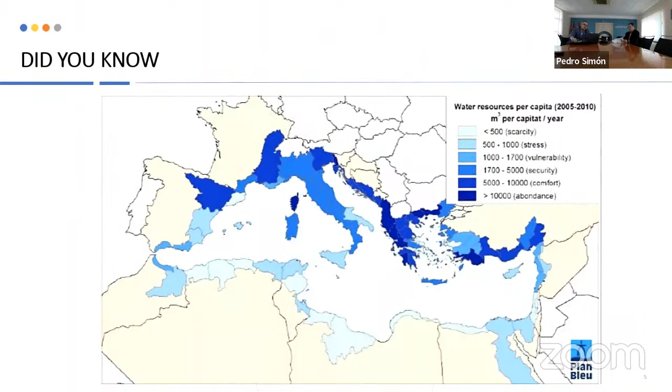So, some statistics concerning the Mediterranean challenges. We are all aware that the availability of water in the Mediterranean basin is limited. Therefore, our area is one of the most vulnerable to the water crisis. As you can see in this picture, freshwater resources are unevenly spread across the country.

Nearly two-thirds are concentrated in the northern rim countries, while most countries on the southern and eastern shores of the Mediterranean are under water stress, disposing of less than 1,000 cubic meters per capita per year. This amount corresponds not only to domestic uses but also agricultural and industrial uses per capita in a country. Some countries like Libya, Malta, Jordan, Palestine, Israel, Tunisia, and Algeria, which count altogether a population of roughly 80 million people, are in a structural shortage situation with less than 500 cubic meters per capita per year.

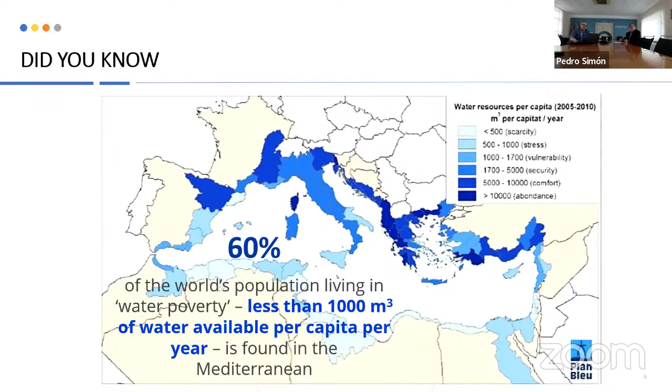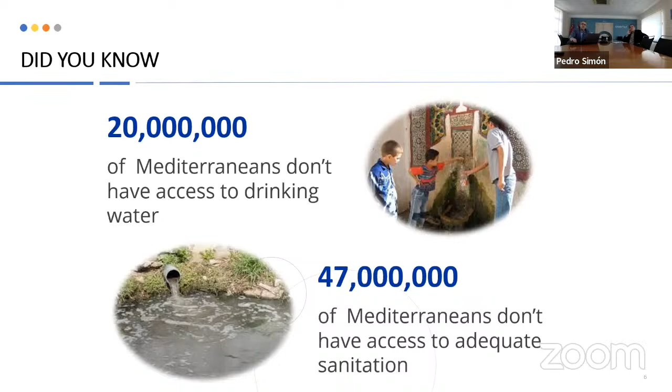About 20 million Mediterraneans, I think this is a quite old statistic, it's more now, don't have access to drinking water, while 47 million Mediterraneans don't have access to adequate sanitation.

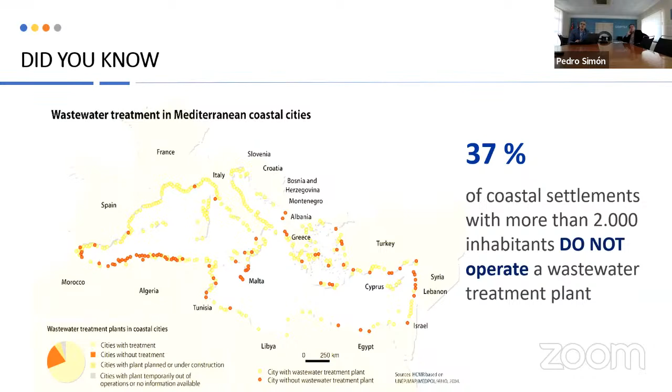Concerning wastewater treatment plants, as you can see in this figure, the distribution is not uniform across the Mediterranean region, with no sewage treatment in many cities on the southern shore of the Western Basin, such as coastal Sicily, the eastern coast of the Adriatic, the Aegean, and the northern corner of the Levantine Basin. Around 37% of coastal settlements with more than 2,000 inhabitants do not operate any wastewater treatment plant.

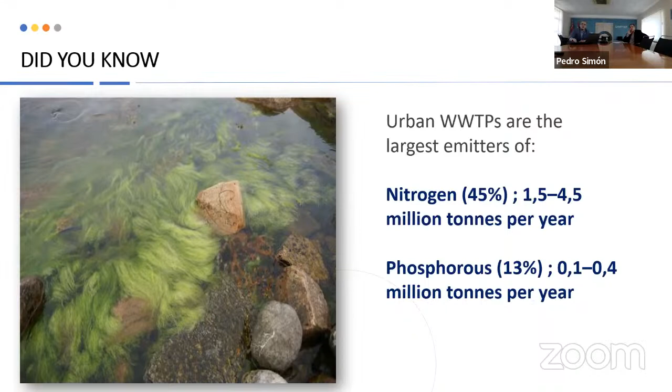You are all aware of the nutrient problem that creates eutrophication. Urban wastewater treatment plants are the largest emitters of nitrogen and phosphorus, with around 1.5 to 4.5 million tons per year of nitrogen released to surface waters, while phosphorus release is 0.1 to 0.4 million tons per year, creating these big eutrophication issues. This could be a major source of nutrient recovery for valorization as fertilizer in our backyard agriculture.

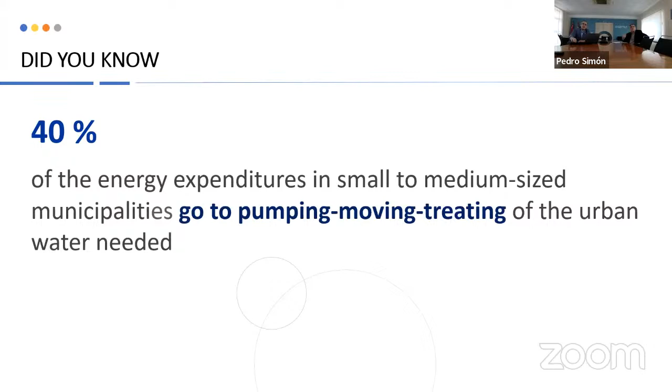Concerning the market, around $211 billion is expected to reach the water market by 2025. As you understand, this opens and provides many opportunities, job opportunities, especially for green jobs.

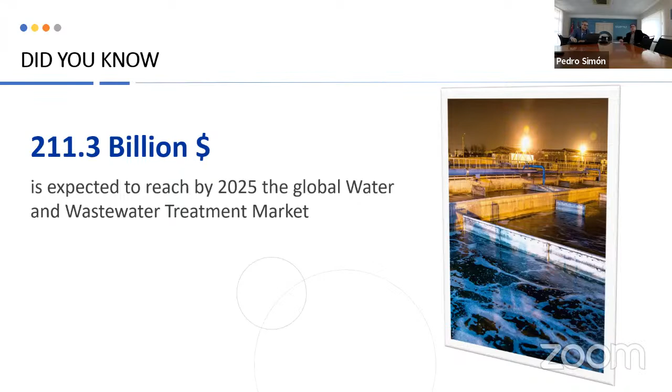So to summarize, people say that numbers don't lie. I would say that statistics don't lie, since the numbers don't tell the whole story, but sometimes can be manipulated. From the statistical data presented, it is understood that the Mediterranean area is one of the most vulnerable to water crisis and to the impacts of global warming. Despite some currently encouraging progress, the current water use efficiency in the drinking water and irrigation sector still presents a challenge for the area.

So let's move now to the next slides. Concerning the project that I'm currently coordinating, this MedWeCap project. MedWeCap is a capitalization project, as already mentioned.

This is the first time that the European Union, under the ENI CBC Med program, funds this kind of project, which answers the need to enhance and make further use of the consolidated results and knowledge and experiences of a selected number of successful projects implemented in the Mediterranean area, including our joint project with Pedro Aquacycle, under the same thematic priority, which is water efficiency.

Specifically, in MedWeCap we aim to promote, exploit, and disseminate the successful practices and results of 6 previously financed projects in the Med region on non-conventional water resources, treatment and reuse for the mitigation of water needs. When we talk about non-conventional water resources, we're talking about treated wastewater, municipal especially.

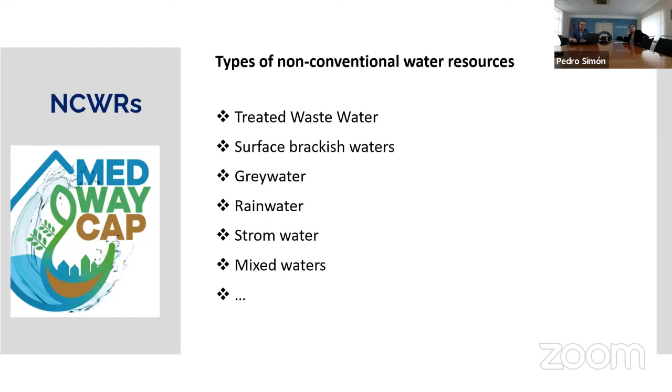We're talking about surface brackish water, grey water at the domestic level, rainwater harvesting, stormwater, mixed waters, and all kinds of waters that humanity does not necessarily valorize directly in order to produce drinking water, such as groundwater or surface water.

About the program, the project identity: the project is funded under priority B41 and is composed of 5 EU partners, 4 Mediterranean partners, 1 international organization based in Italy, and 12 associate partners from Greece, Italy, Malta, Spain, Egypt, Palestine, Tunisia, and Jordan.

The main challenge is to provide challenge-driven cooperation in the area through a coherent and continuous cross-border dialogue and process, capacity building of the related staff, and easy access to information and friendly use of tools for mutual learning. It's a 2 year project that started on the 1st of October 2021, and will end this year by the end of September. It has a total budget of 1.1 million euros, with an ENI contribution of about 1 million euros.

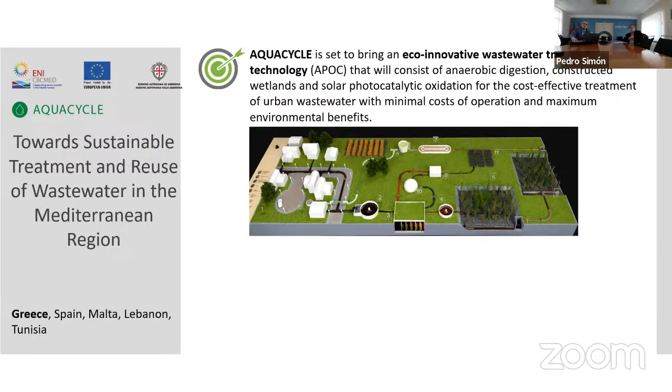The minimum energy required for the operation of this plant can be covered by renewable energy such as photovoltaics, or by the biogas produced from the anaerobic digestion process, in order to heat the respective reactor.

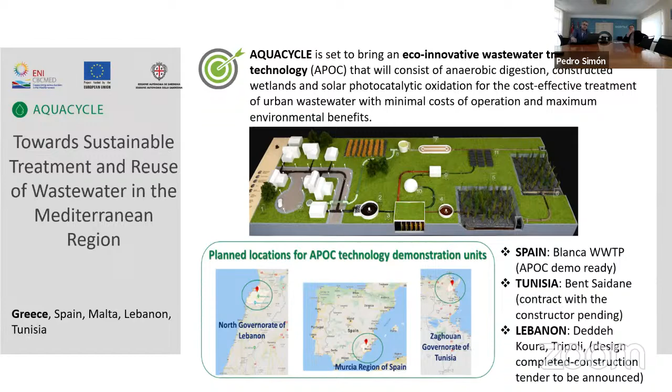Here you can see some info concerning the APOC system. APOC stands for anaerobic digestion, photocatalytic oxidation, and constructed wetland. Anaerobic treatment and constructed wetland are two mature commercialized technologies with wide applications, combined with this novel photocatalytic oxidation for high disinfection and removal of contaminants of emerging concern.

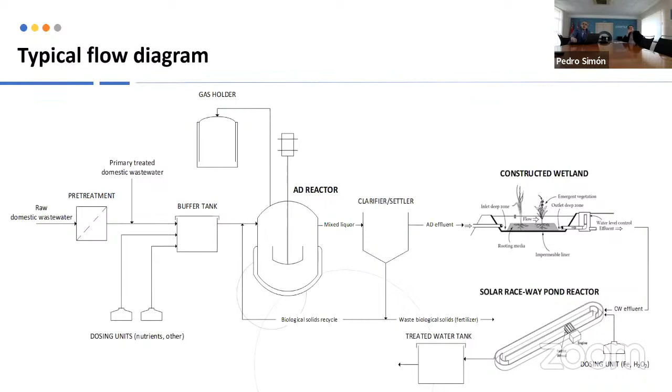Here is a typical flow diagram, a sketch, but of course this is a matter of design depending on the composition of the effluent and the final treatment target set by the designer.

I would like to say a few words concerning solar photo-Fenton. It's an advanced chemical oxidation process that has attracted major scientific interest as a promising alternative for the degradation of contaminants of emerging concern. The heart of this process is the in-situ production of strong hydroxyl radicals, an environmentally friendly reagent with a half-life of a few nanoseconds that can destroy all kinds of emerging organic pollutants.

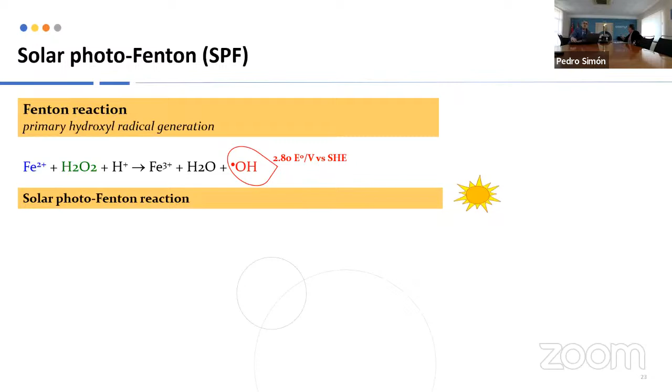Since this could be an energy-intensive process, we valorize solar energy to promote a higher regeneration rate of the iron species required to drive this reduction for the in-situ production of hydroxyl radicals. On the other hand, solar radiation also promotes the photolysis of iron carboxylate intermediates for the recovery of iron, to catalyze again the reaction with hydrogen peroxide for the production of hydroxyl radicals.

And also the photolysis of hydrogen peroxide in the UVB region promotes an additional production of strong hydroxyl radicals. And at the same time, we can have a direct solar disinfection. These are the main APOC benefits.

On one hand, we utilize solar energy, which is an abundant resource in the Mediterranean region. We can also produce biogas by anaerobic digestion. We minimize the production of excess secondary sludge we see in conventional aerobic systems. We also have a solid digestate that can be used for land fertilization. And these systems, as you have understood, can be implemented using local skills and know-how without any necessary expertise.

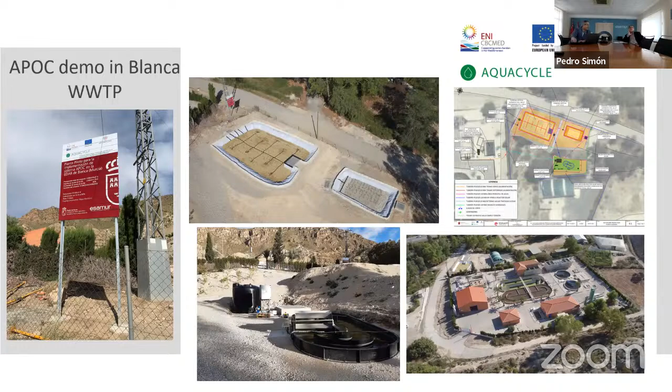Here you can see some photos of the APOC demo plant in the region of Blanca, wastewater treatment plants. I don't know if Pedro will talk about it later in his talk.

I would like also to invite you to visit our e-training platform produced by the AquaCycle Partnership, describing the principles for the design, the operation, and the maintenance of the three different components of the APOC system. I invite you also to register to our forum. This tool is useful. It's an open access tool. It can also be used by professors to train students on the different components composing the APOC system.

A few slides concerning the NAWAMED project. NAWAMED is also a project funded by ENI CBC Med with partners from 5 countries. We have joined forces to implement real-scale pilot installations for grey water in this case, not municipal wastewater, for grey water and rainwater treatment and reuse in each participating country, in Italy, in Tunisia, in Jordan, and in Lebanon. And the recovered grey water will be reused for different purposes, including toilet flushing and irrigation, therefore reducing the consumption of potable water for domestic uses.

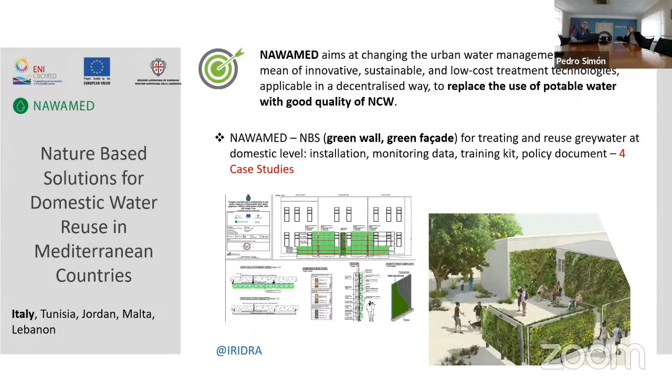In this specific project, we see the implementation of nature-based solutions, such as green wall and green facade technologies. For this specific technology, we have 4 case studies. Here are some slides concerning the living wall in Ferla, Italy, which has been installed in a middle school in Sicily with a total of about 190 students.

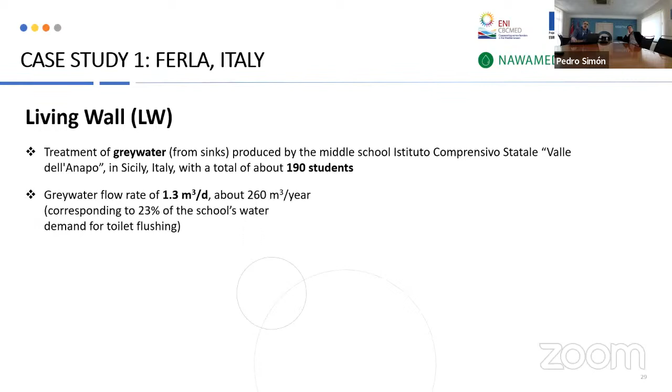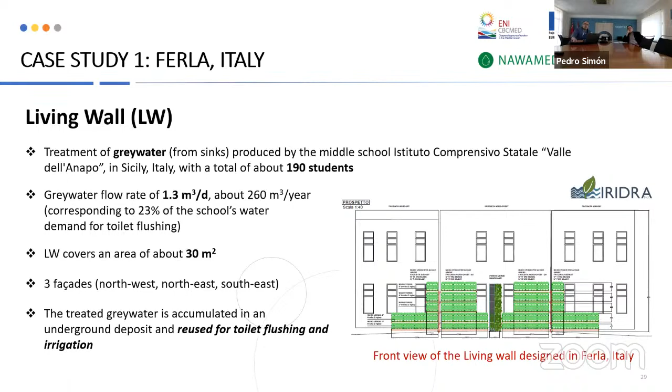Here you can see some info concerning this specific living wall with an area of about 30 square meters and a grey water flow rate of 1.3 cubic meters per day, and the treated water is used for toilet flushing and for irrigation. Here you can see some photos of this installation, and the good thing is you can also see an educational activity for the students to learn more about how this nature-based solution operates and treats the grey water produced within the school.

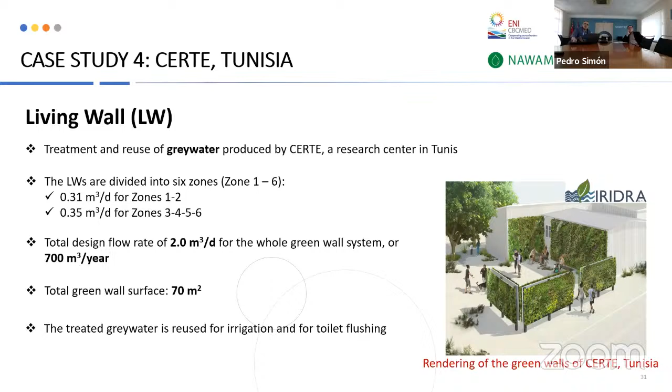Another case study at the premises of CERTE, which is an institution there in Tunis. Again, applying this living wall concept with 2 cubic meters per day of design flow rate capacity, which equals 700 cubic meters of grey water reused. Here the total surface area is larger, 70 square meters. And again, this specific installation is used for toilet flushing. Here you can see that the vegetation is in a growing stage in comparison with Ferla in Italy.

So now we move to MENAWARA. It's another project that is currently being capitalized by the MedWaterCap project. This specific project is coordinated by the University of Sassari in Italy. And this project is proposing sustainable, clean and environmentally friendly solutions based on the reuse of non-conventional waters, in particular drainage water. Fundamental for this project is the fit-for-purpose approach, a new important concept in water reuse, which entails the production of reclaimed water quality that meets the needs of the intended end users.

Here you can see one technique implemented, which is the managed aquifer recharge technique based on forested infiltration areas for treating nitrate-polluted groundwater and drainage water in Arborea in Italy. Here you can see some actions promoted through the MENAWARA project.

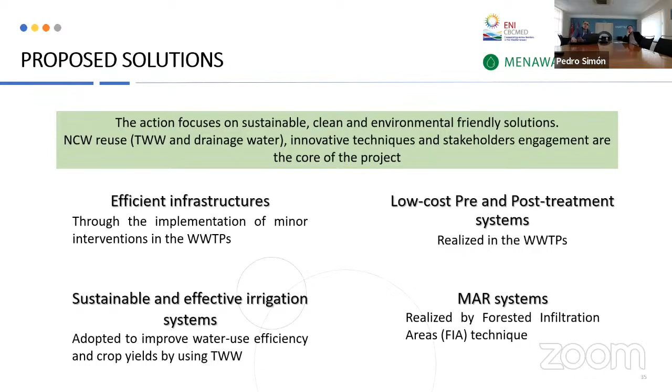So on one hand, we have the implementation of minor interventions in existing wastewater treatment plants. We have the development of sustainable irrigation systems to improve water efficiency and crop yields by using treated wastewater. We have low-cost pre- and post-treatment systems realized in wastewater treatment plants and these MAR systems which are currently implemented in forested infiltration areas.

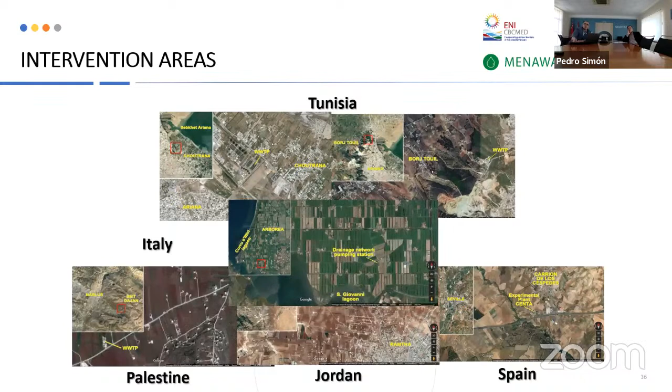Here you can see the demonstration areas in Tunisia, in Palestine, in Jordan, in Spain, and in Italy. Here you can see also in Jordan the different irrigation methods applied, such as sprinkler, surface, drip, and subsurface, on alfalfa to improve the alfalfa yield, quantity, and quality.

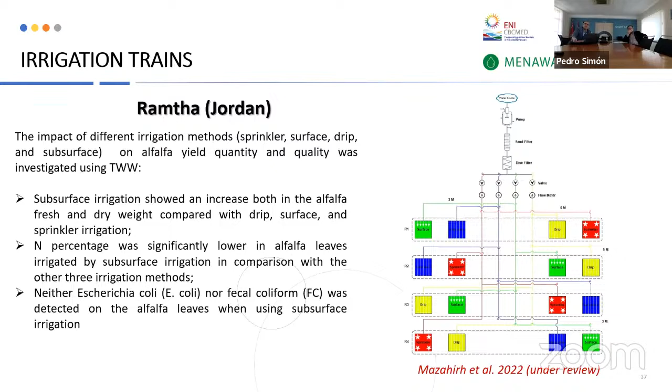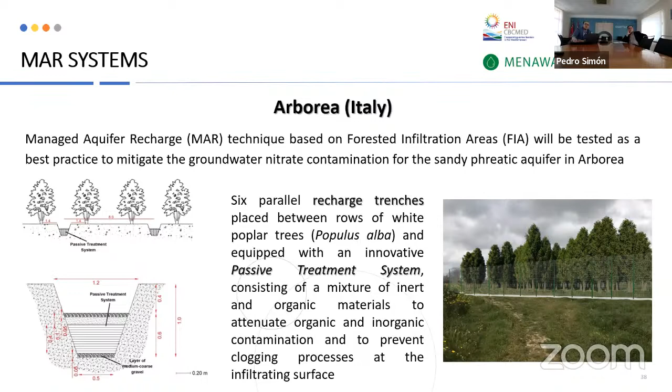In Arborea, I already mentioned this MAR technique. Six parallel recharge trenches are being implemented, placed between rows of white poplar trees and equipped with an innovative passive treatment system consisting of a mixture of inert and organic materials to attenuate organic and inorganic contamination and to prevent the clogging processes at the infiltrating surface.

So to conclude, I don't know about the time. I think it's already 30 minutes that I'm talking.

And concerning the labor market, we see that 3 out of 4 jobs worldwide are water dependent, while 15 million jobs should be created in the next decade to absorb the growing labor supply in the Mediterranean region. In order to tackle this issue, which is a global challenge, we need a collective response involving public and private stakeholders, government, academia, businesses, and civil society at local, national, and regional level, to improve and consolidate these systems, some of which I have already presented in previous slides.

And we as researchers are here to propose, to research and to promote best practices that rely on success stories from previous and ongoing R&D projects, which could potentially pave the way for the improvement of treated wastewater reuse as a non-conventional water resource that can contribute to mitigating the local water shortages in our region.

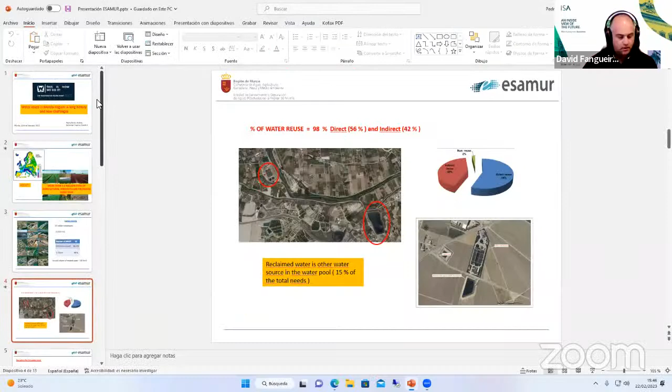Pedro Simón Andreu is an industrial engineer with more than 30 years of experience in water management, especially wastewater treatment. He worked in several companies, namely Aquagest, and more recently in the Entidad de Saneamiento de Comunidad Valenciana, a public company responsible for the wastewater treatment. Since 2022 he is working as technical director at ESAMUR, the regional public company responsible for the wastewater treatment system in the Murcia region, but is also a teacher in several international masters and courses related with water treatment. He published several book chapters and papers on this topic and participated in more than 15 European research projects.

And to highlight the fact that he's collaborating with the JRC and involved in the regulation on water reuse. Finally, I would also like to stress that he's coordinator on water reuse in the Spanish Association of Water Supply and Sanitation, and vice president in the Spanish Association for Sustainable Water Reuse. So a strong background on water treatment, and today he will share with us some thoughts about water reuse in the Murcia region, a long history and new challenges. Pedro, the floor is yours, about 25-30 minutes.

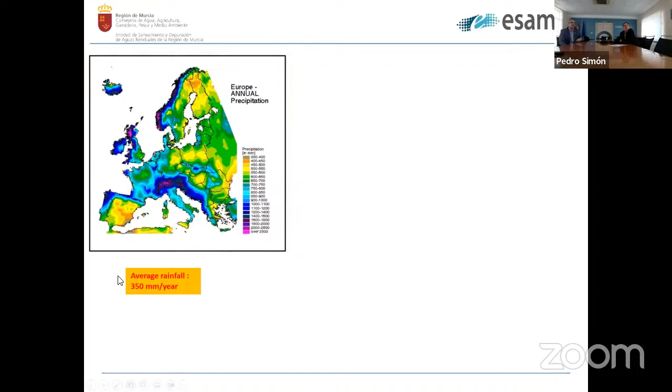In the title, I describe a long history and new challenges. Why? Because we have been reusing water for more than 20 years, and we have a long history about that. Well, why do we reuse water? We are here in the southeast of Spain, and the color of this zone is brown. It means that the precipitation in the region is the lowest in all Europe. The average rainfall is 350 millimeters per year, and at the same time, we produce more than 2.5 million tons of agricultural products every year. It means that we need every water source close to us. So for us, it's very, very important to reuse the water.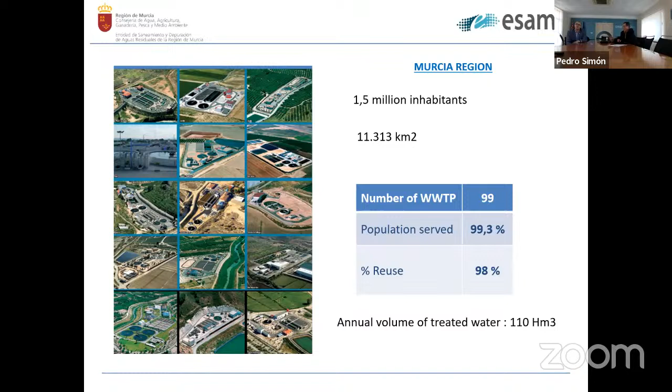Why do I say that we have 98%? Really, we have direct reuse and also indirect reuse. Most of the water is directly reused in agriculture, and 42% is indirect. But although we consider this indirect, it's as if it were direct. Why? For example, here we can see this wastewater treatment plant, and this is the Segura River, the river in the region of Murcia. The flow of this river is very, very low. And this wastewater treatment plant doesn't have permission to reuse the water, because the basin authority needs an ecological flow in the river. Then we have to discharge it.

But 500 meters after, we can see this pond in which some irrigators are taking water from the river and using this water. What does it mean? We make a similar treatment in this plant as in other plants that have direct reuse. Because if we discharge this water without disinfection, when the irrigators take the water, it won't be in good condition, and they can have a problem with that. For that, all the wastewater treatment plants in the region of Murcia have advanced tertiary treatment to disinfect this water, because it's very important for us not to create any problem for the river and the users of the river water.

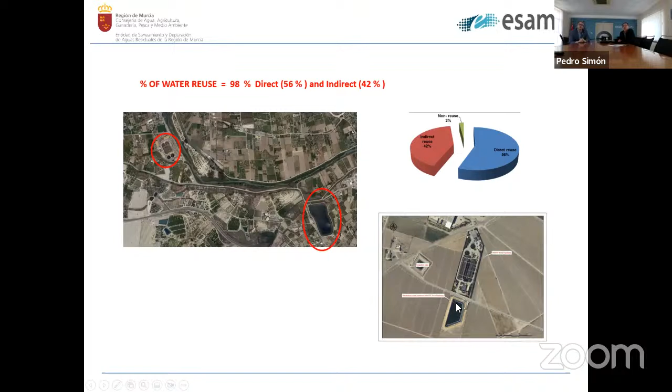But usually we have the wastewater treatment plant, and after there is a pond of the irrigators community. We discharge the water to this pond, and they take this water for their uses. Usually, they mix the water with other water sources, because this water is not enough for all the agricultural production in the region. In fact, reclaimed water is another water in the water pool, representing around 15% of the total needs in the region. The total needs are around 800 cubic hectometers for all the agricultural production in the region, and 15% comes from water reuse.

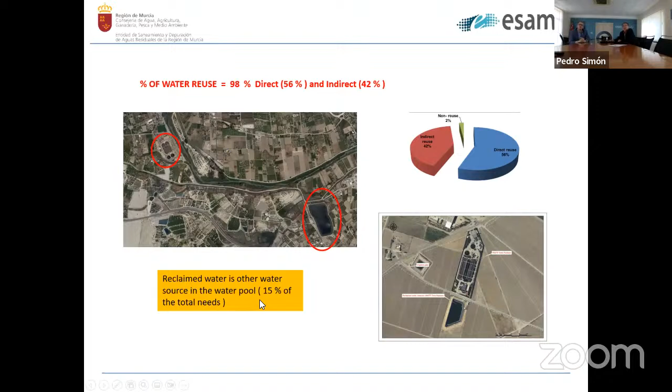Some key points I would like to highlight. Firstly, it's important to reuse the water we have, due to scarcity of water, current or future, because many times we think we don't need water now because we have, for example, water from an aquifer, but we may be wasting this aquifer. It's important to know not just what is happening now, but what will happen in the future. That's the sense in which I say scarcity of water.

Political will is very important. For example, here in the region, it was decided in the sanitation master plan of 2000 that water reuse is a key point. All the facilities built since that year have advanced tertiary treatment for disinfection. This decision by the authorities is very important.

Another crucial aspect is that we need adequate and sufficient treatment infrastructure. Without it, it's impossible to give water of enough quality for irrigation. Also very important are adequate control and management systems. In this case, ESAMUR is the public company that controls and manages the entire wastewater treatment system in the region of Murcia, all these wastewater treatment plants, and we have very strong control over all the facilities.

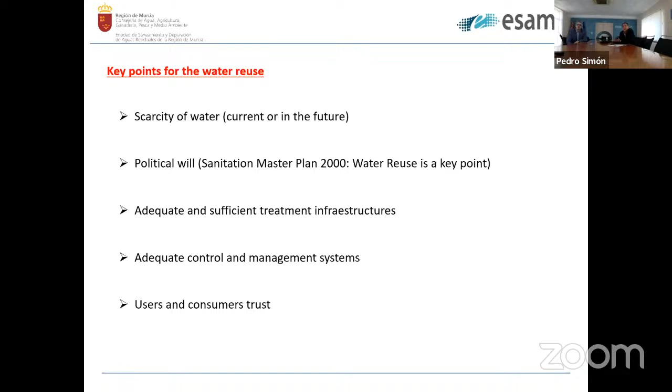Something crucial is the users' and consumers' trust. If they don't have trust, they are not going to use this water. It's very important to create that trust - they have to be sure that the water is safe, that the used water is safe. If not, they are not going to use it.

For that, the first thing we need is to treat the water perfectly. We can see in this slide the efficiency of our wastewater treatment plants. This is the average across all wastewater treatment plants in the region, and we can see that BOD5 removal is on the order of 99% efficiency, COD around 96%, and suspended solids around 98%.

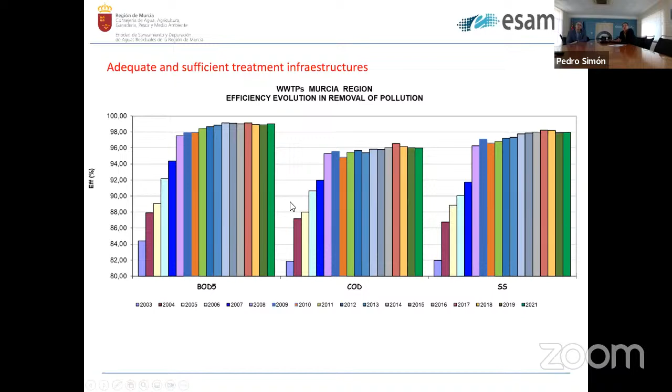Why do we need that? Because it's very important to achieve a very good secondary treatment in the wastewater treatment plant in order to be able to reuse the water viably. If the quality is not very good, it will be very difficult to get good disinfection, and the dosage or energy we would need will be very high. So the secondary treatment has to work perfectly - otherwise it's very complicated to reuse the water.

I'm going to show in this slide the usual tertiary treatment that we have. When I say tertiary treatment, I'm always speaking about disinfection, not nitrogen or phosphorus removal, which we also have in most of the plants.

When we want to get reclaimed water, we first need to prepare the water to be disinfected. How do we prepare it? We have to use a system to remove as much as possible of the solids and improve the water quality, because we need water in very good condition so the dosage we have to employ will be lower. For example, if we have solids, they act as a shield for the bacteria, and then the bacteria won't receive the dosage needed to kill them. So it's very important to remove as much of the solids as possible.

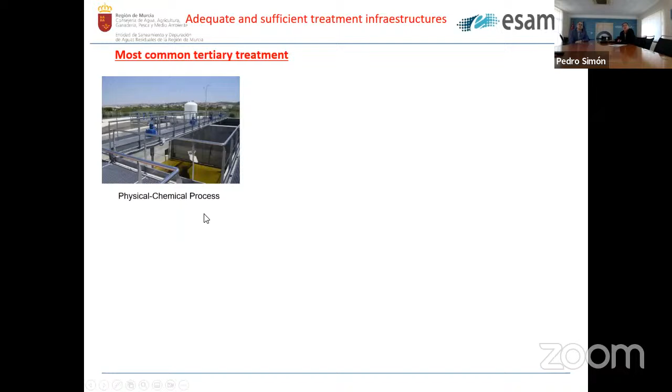First, we have a physicochemical process to remove the colloidal solids in the water. After that, we have lamellar settlement, and then filtration - many types of filtration, since we have many different systems: sand filtration, open or closed, and other systems like cloth filtration. After that, the water is prepared.

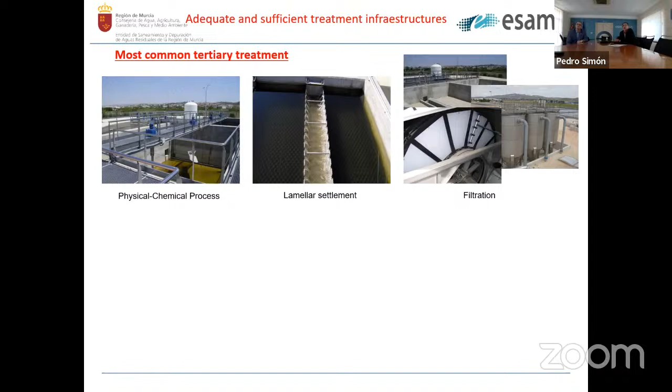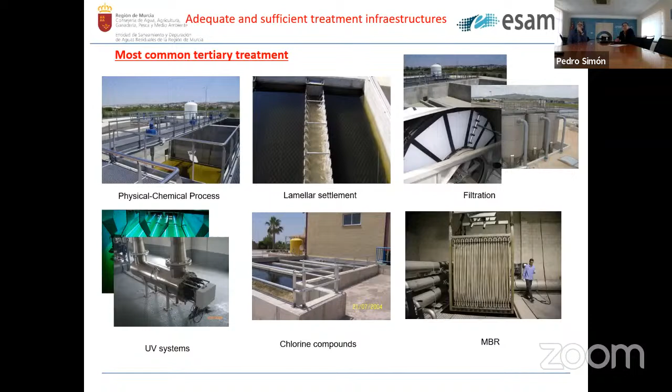Now we go to the disinfection properly said. This is usually done with a UV system, which we can see by open channel or by reactor. We also sometimes use chlorine compounds - many times these systems are combined. And we also have membranes, which are very effective for removing pathogens as well.

We need the maximum reliability of the facilities, because we have to create confidence in the users. For example, we are using technologies like CFD, computational fluid dynamics, to know perfectly what is happening in every part of, for example, a UV channel. If any current of water is too far from the lamps, we cannot give the needed dosage to kill the bacteria.

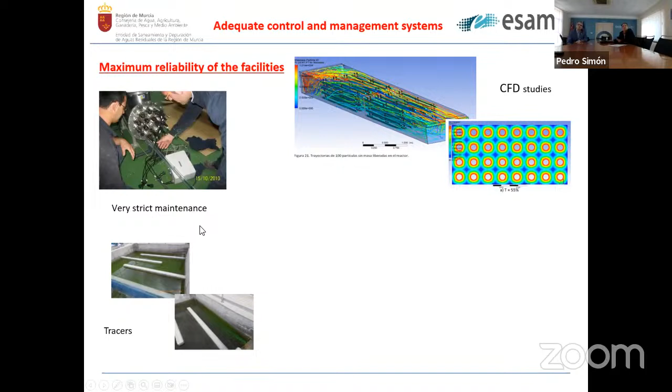This type of work is very important. Also, for example, with tracers, to know what happens here, and if we have any short circuits or dead zones, that means we are going to spend less time with the oxidant in contact with the water, and then we are not going to get enough disinfection. Of course, we need very strict maintenance. It's very, very important, we cannot have any mistake. And of course, we need online sensors with alerts, a lot of online sensors, to avoid any problem.

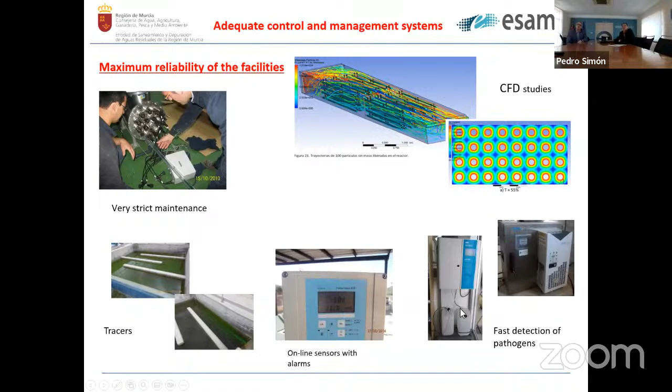Now we are also working with fast detection of pathogens with online systems. We are working with some of them. And also, in all of our wastewater treatment plants, we have implemented a risk management system, the same one used in the process of security of drinking water supply.

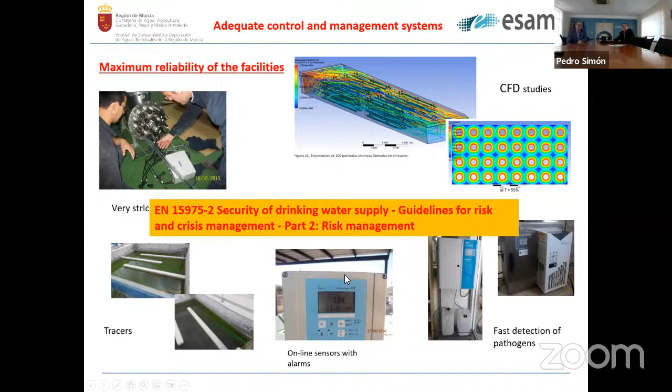We have to give confidence, and we have to be sure that this water is not going to create any problem to the irrigators. So we have a greenhouse in our wastewater treatment plant to study microorganism survival in crops. We make studies in this greenhouse, and we know a lot about it.

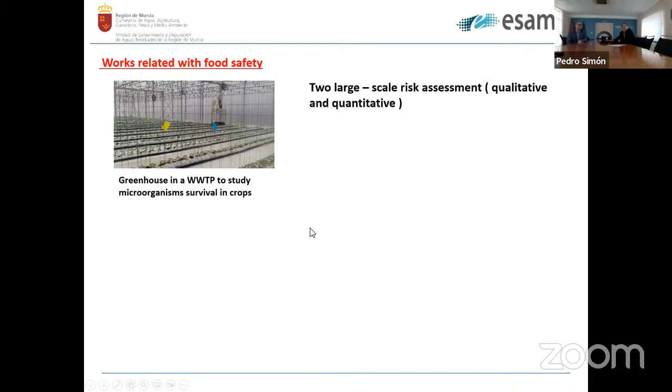And we have made two large-scale risk assessments, qualitative and quantitative. We can see here some pictures of this wastewater treatment plant - the ponds, the crops, and when we are taking samples.

We have tested with different treatments, chlorine and UV, and different irrigation networks - very important to know the effect of storage in the reuse, because we have to be sure that the quality we deliver at our wastewater treatment plant is very good, but we want to check that there isn't any problem after the water leaves the plant, because it could happen.

And with different irrigation systems, we have tested flood, sprinkler, and drip. We have chosen some agricultural products that are very demanding, for example lettuce or spinach that we can eat directly. And we have also been measuring indicators and pathogens, not only indicators like E. coli, but also Campylobacter or real viruses.

This is very important. If you want to reuse the water, you need to think that it's a responsibility. You cannot have any mistake, never, but you have to fight for that.

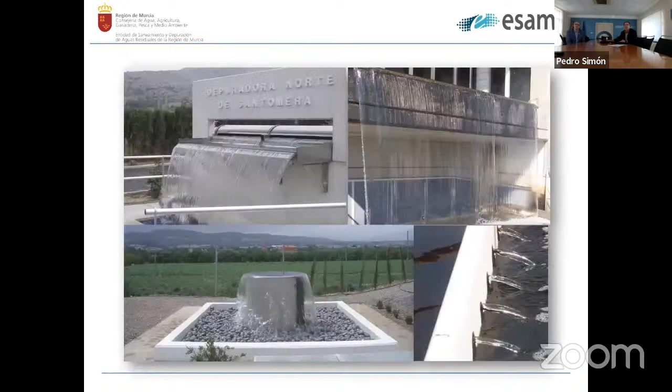And that's everything. Thank you very much for your attention. I'll answer any questions you have.

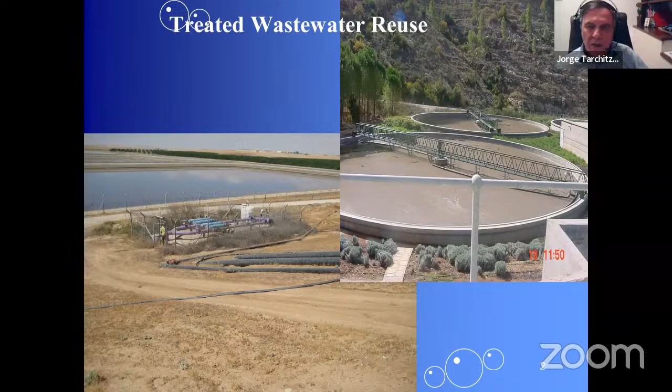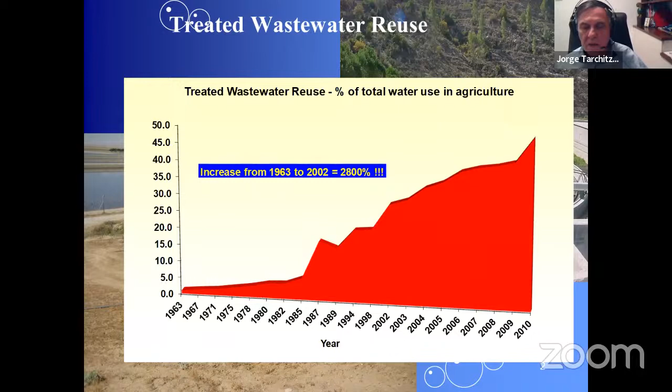So first, the background of my work is in Israel. Israel has irrigated with treated wastewater since the 50s, 1950, but the main increase was in the 90s because of a period of drought, without the desalinization of water that we have today. So the government decided to increase the use of treated wastewater for agriculture. This increased to today about 40 to 50% of the total water used in agriculture, so that half of agriculture is irrigated with treated wastewater, and more than half of the different crops we are growing are irrigated with treated wastewater.

This was done because the government decided the fresh water was needed to provide to the cities, to the population, and established a new strict regulation that is the base for the ISO standard 16075, and conducted the upgrading of all treated wastewater to tertiary treatment level, a level suitable for unlimited irrigation. You can irrigate all kinds of crops, with improvement of the quality regarding contaminants during use, or the addition of contaminants during use of fresh water, mainly from industrial wastewater that goes to treatment together with the municipal wastewater.

As I explained, during my work in the Ministry of Agriculture in the 90s, I was the national coordinator for the use of treated wastewater in agriculture. So I want to speak about something very practical and basic. We asked, and the farmers ask, does treated wastewater really contribute to a balanced supply of nutrients for agricultural crops? And does the use of treated wastewater enable proper management of the fertilization program?

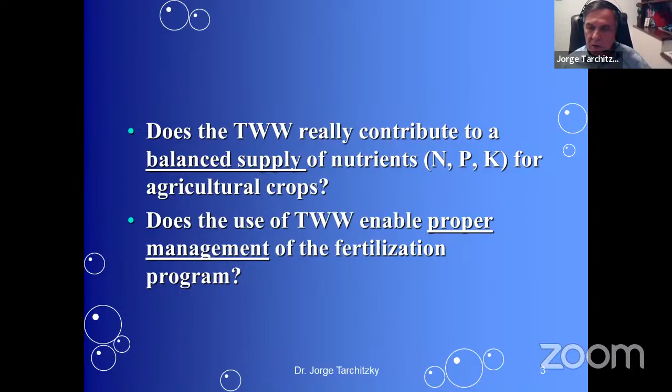Now, normally treated wastewater has nitrogen, phosphorus, and potassium. We have three main factors: the amount, the quantity of nutrient we apply with the treated wastewater, and the question of whether this amount is enough; the timing, whether we are applying the nutrient at the time the crop needs it; and the availability.

One question from farmers was whether the nitrogen in treated wastewater behaves the same as when I apply chemical fertilizer with fresh water. The nutrient we apply is normally the result of the treatment plant process, and the concentration of the nutrient is more or less constant. So the quantity I apply during an irrigation is the result of multiplying the constant concentration by the quantity of water used.

For example, with a dose of 5,000 cubic meters per hectare and a concentration of 50 grams per cubic meter, I apply about 250 kilograms of nitrogen per hectare. If I take into account that part of this nitrogen is organic, I am applying about 220 kilograms of nitrogen.

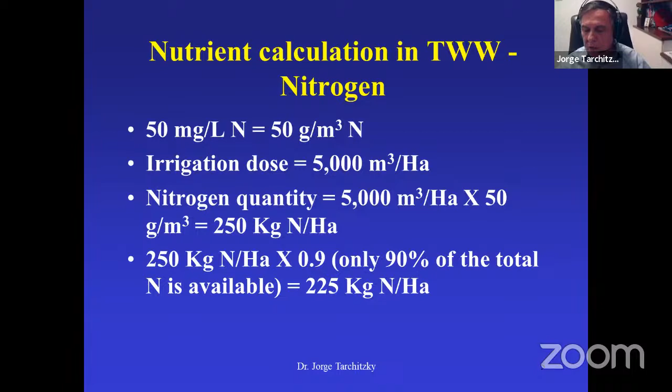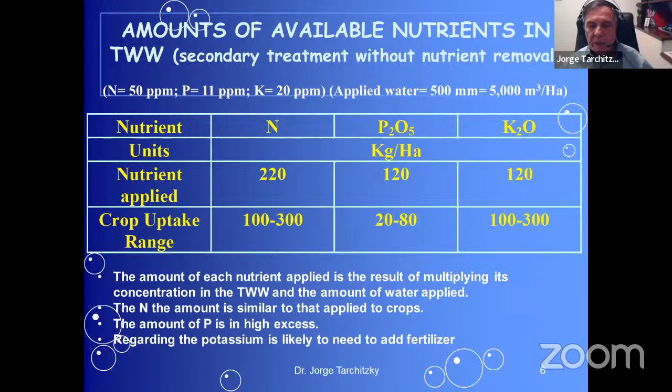Now, if I look at this table, we have the nutrients that we applied. I calculate this in the same way as in the previous slide. We can see that I apply 220 kilograms of nitrogen, 120 kilograms of phosphorus, and 120 kilograms of potassium. If we compare this with the crop uptake range, that is the basis of the fertilization, looking at the total quantity, more or less I give all the nitrogen that the crop needs. I give less potassium than the crop needs, so maybe I have to add potassium. But I apply 4 to 5 times the quantity of phosphorus that I need, since the phosphorus is in the irrigation water. We will come back to this later.

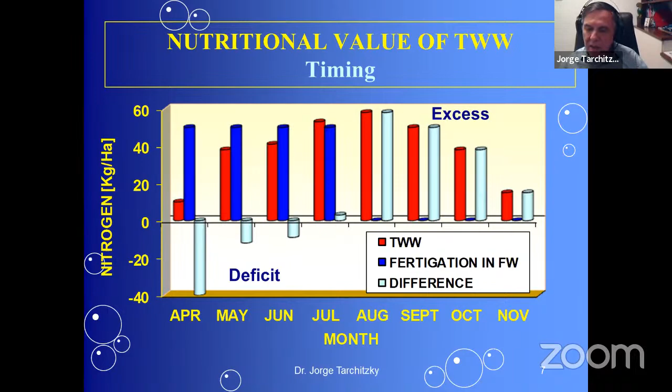So I can say that using treated wastewater, I have a period of deficit, during which I can add fertilizers to the wastewater. But in the second half of the season, I have an excess of nitrogen, and I cannot remove it from the field because I don't need the fertilizer at that moment. So we have a problem of timing, and because our objective is to irrigate, not to fertilize, with the treated wastewater, the result is these periods of deficit and excess.

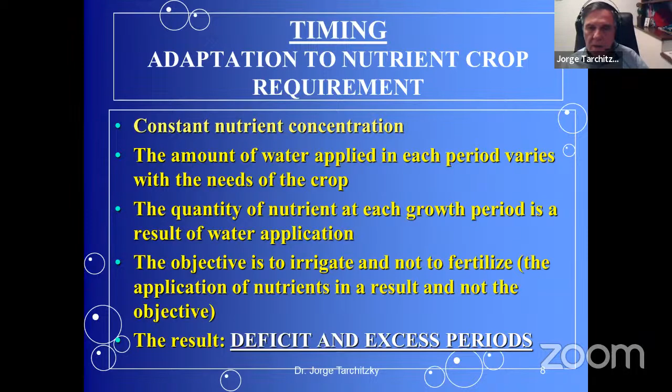Regarding availability, most of the nutrients in the treated wastewater are available to the crop. The crops have no difference between ammonium that comes from ammonium sulfate and ammonium that we have in the treated wastewater. For the plant, it's the same.

What I present here is from when I was in charge of the National Survey of Treated Wastewater, in the Ministry of Agriculture. We tested 150 plots over 10 years, most of them irrigated with treated wastewater and a smaller quantity with fresh water. We asked the farmers how they were fertilizing their plots. Here we have the quantity of nitrogen applied: blue is fresh water, and red or pink is treated wastewater. On average, farmers give 30% more nitrogen in the treated wastewater irrigated plots.

When I look at the specifics of each farmer, some farmers say the treated wastewater has all the nutrients, so they don't fertilize at all. Other farmers say nobody puts nitrogen in the water, so it has no fertilizer nitrogen, and they give twice the quantity of nitrogen that the crop needs. So the key point is that all the nutrients are available to the plant, and you have to explain this to the farmers, because otherwise they create a deficit or an excess of nitrogen or other nutrients.

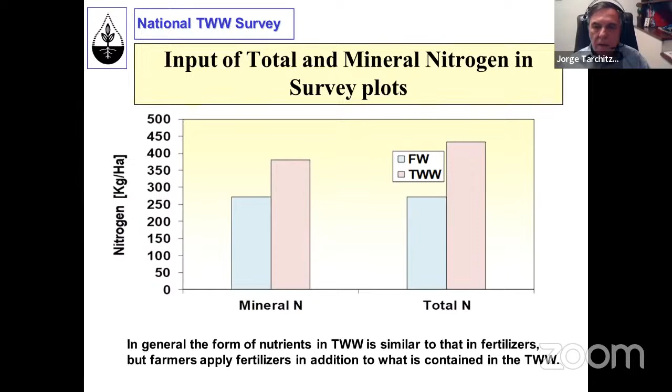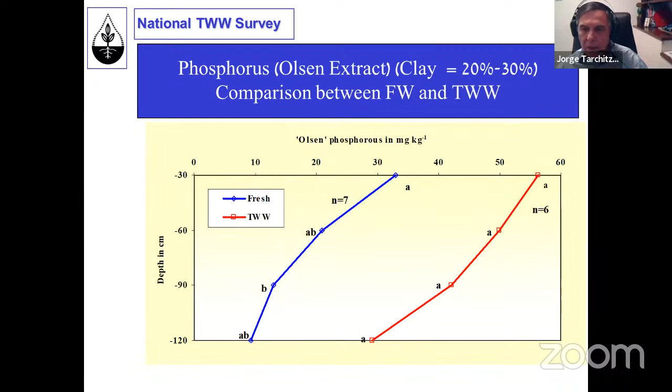And another thing, something that is not characteristic in the Israeli soil: because we add all the time a lot of phosphorus, we achieve saturation at the first layer in the soil, and the phosphorus is going to the depth. Normally, in freshwater irrigated plots, we have a very high concentration in the upper layer of the soil, and no movement to the depth, because the soil has high pH and the movement is limited.

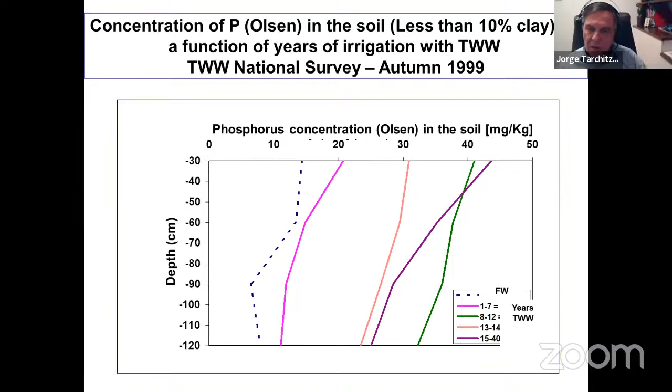The question is not only what we are doing to the soil, but what are the effects, and I separated and put some examples of agronomic effects. And we can see that the nitrogen overdose enhances the vegetative growth with lower reproductive growth. In other words, decreasing the yield.

In some crops, decreasing the sugar content, decreasing the sweetness of the fruits, postponement of the ripening of the fruits, the development of the color of the fruits is slower. For example, if you have oranges, to sell the orange we want a very good orange color, but the development of the color is very slow, and you have to collect the yield later. And shorter shelf life of fruits preserved in refrigeration, like apples or something like this.

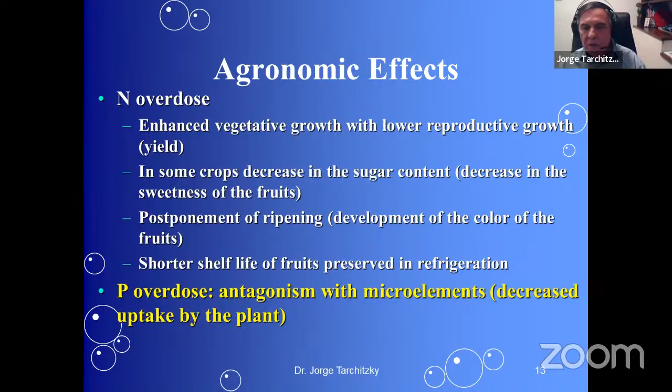The P overdose is antagonistic with the microelements, decreasing the uptake by the plant. And environmental effects: the most important environmental effect is the nitrate leaching to underground water. If you remember the graph with the higher concentration of nitrogen in the treated wastewater irrigated soil, that is twice the concentration than with the fertilizers, all this excess of nitrogen at the end is going down, and if we have underground water, we increase the concentration of nitrate in the underground water.

And some phosphorus leaching to the surface water, and I think that Konstantinos spoke something about this in the presentation. It is going with the runoff, and sometimes leaching to the underground water, mainly when you use this treated wastewater in soil with low pH.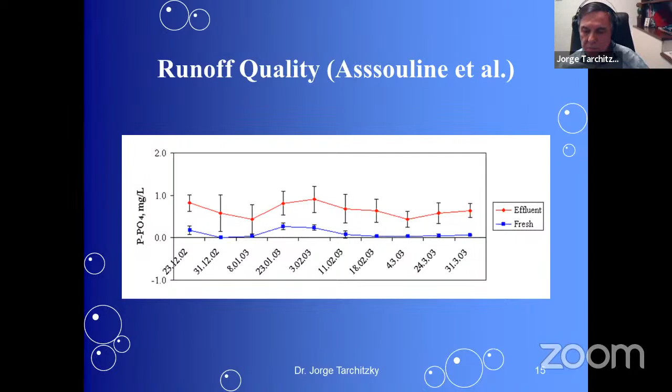So the solution, the first possibility that is today in a lot of wastewater treatment plants, is nutrient removal in the treatment plant. In this case, the phosphorus is going to the biosolids and the nitrogen is going to the atmosphere. In Israel, the new, not new, it's 10 years ago, but the regulation established lower concentration of phosphorus.

The lower concentration is because I presented the result of the survey and we see this. So we established in the committee a maximum concentration of 5 milligrams per liter of phosphorus in the water. It's not low enough. 5 milligrams per liter is still high, and the nitrogen was limited to 20-25 milligrams per liter.

The result is the wastewater treatment plants, and maybe later Pedro can speak about this, say, okay, we reduce the phosphorus, we reduce the nitrogen, we cannot stop in the middle of the range. If we reduce the phosphorus, we reduce the maximum. And if we reduce the nitrogen, we reduce the maximum. So in this way, you put a lot of phosphorus in the biosolids by chemical precipitation, and the nitrogen is going to the atmosphere by denitrification.

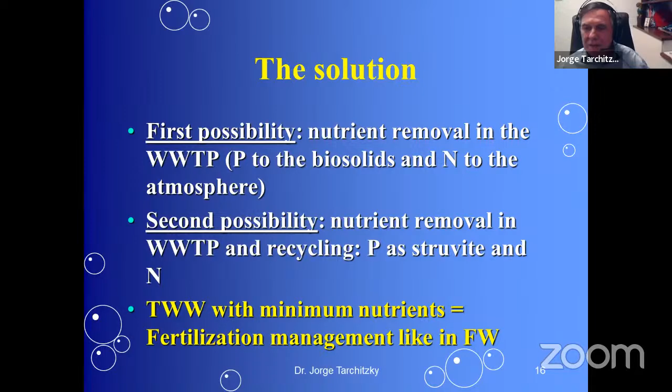And to finish, because David is thinking that I use a lot of time, the treated wastewater contains nutrients that in general are applied in excess during all or part of the irrigation season. These excesses have potential negative effects, agronomic and environmental, and the goal has to be to remove these nutrients and recycle them. Thank you.

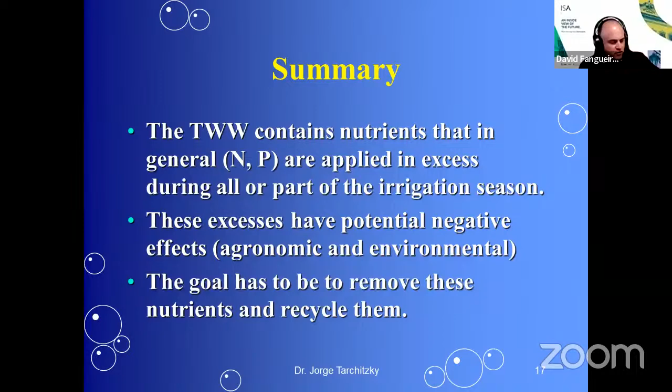Thank you very much, Jorge, for this excellent presentation. It was not too long, it was just on time, so you respected the time to give us some time for questions. The chat is very quiet, so I don't know if there's other questions. If you allow me, I can start with a question.

This last presentation is very close to my area of work, and we have one common problem: treated wastewater is not like mineral fertilizers, where we have just nitrogen, phosphorus, or potassium. We have the three nutrients at the same time, and sometimes it's difficult to balance. I was impressed by the numbers you showed about the P content of the soil, because it's a huge amount. Do you have any idea of the losses of nitrogen to the atmosphere when you use this treated water? How much ammonia, how much nitrous oxide can be lost?

I was in a group where one of the researchers in the Technion tested in a lysimeter system the emission of ammonia to the atmosphere. The expectation was, because the soils in Israel are of pH between 7.5 to 8, and in a clay soil the pH also increases with irrigation with treated wastewater, a lot of emission, but the emission was very small. Very small, but taking into account that the irrigation is drip irrigation.